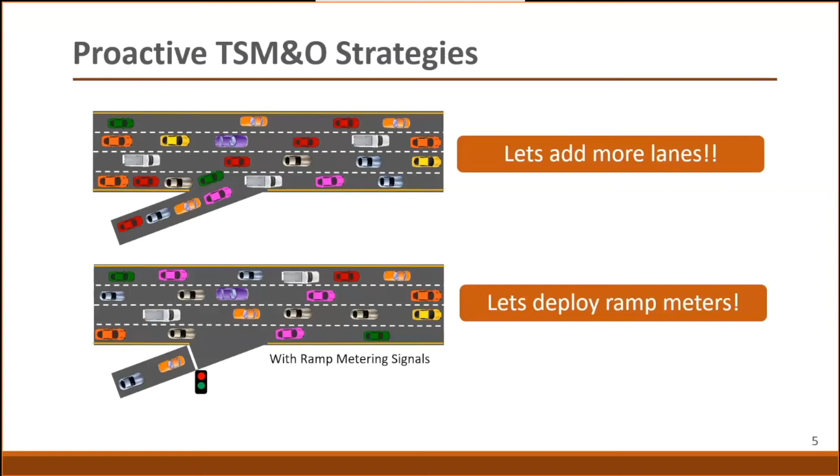I have one more example, though I don't have before-and-after or conventional-versus-TSM pictures here. What I want to show is how dynamic message signs, the signs we see on freeways quite a lot, provide travelers the information we need to make informed decisions. For example, if there's a crash downstream and the DMS says 'crash ahead, use caution' or 'crash ahead, detour,' drivers who pay attention to the signs may actually detour, reducing traffic upstream of that incident and reducing the probability of secondary crashes.

So what I've said so far are just 3 of the many examples of TSM strategies that could improve both safety and mobility of freeway operations.

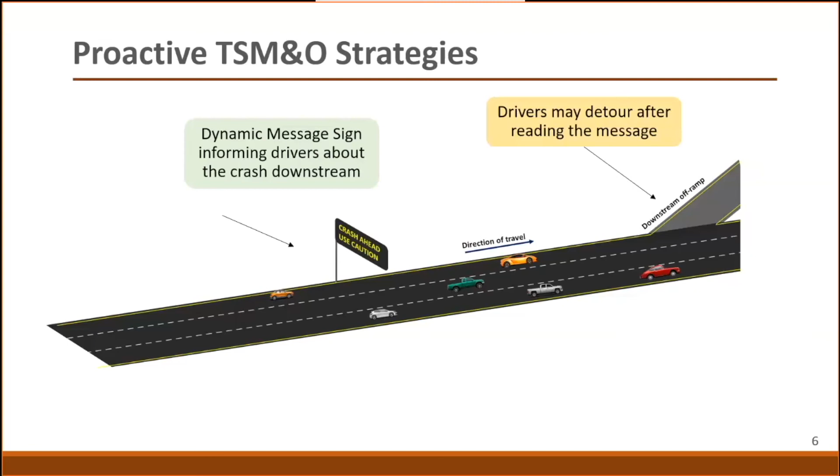Now that we have an idea about what potential TSM strategies are, let's go in depth about what these could do. First, these TSM strategies are integrated; they don't work in isolation, they work together. For example, in this figure you can see express lanes and dynamic message signs, and you also have CCTV cameras and ramp meters. All of these, arguably 4 TSM strategies, are working on the same corridor to improve the safety and operational performance of this freeway corridor.

With this slide, what I want to say is that TSM strategies are integrated, and it's not just one strategy that works. That could be the case, but in general we'd have multiple strategies to help alleviate congestion and improve safety on a facility.

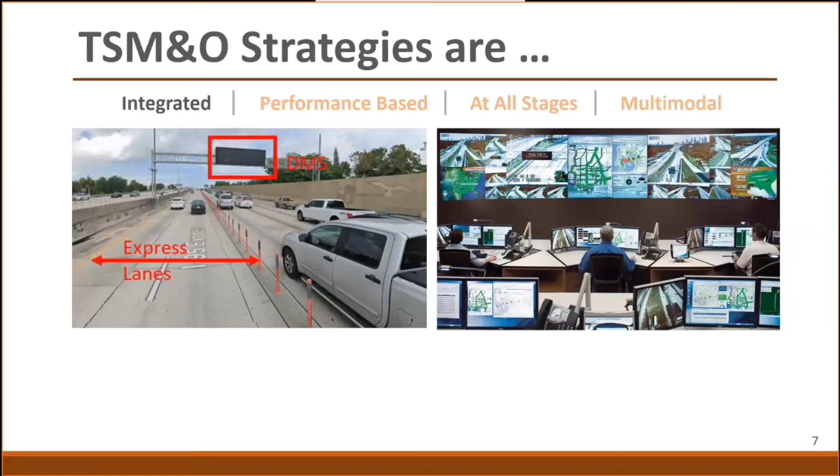Another important factor that separates TSM strategies from conventional strategies or countermeasures is that TSM strategies are performance-based; they're outcome-oriented. By that I mean all TSM strategies are geared towards improving safety and/or mobility. I don't want to say either safety or mobility, because the way I see it, safety and mobility are so intertwined and interlinked that you can't improve one without improving the other. In other words, if you improve mobility, safety will almost always necessarily be improved too, with a caveat in most cases.

And at the same time, if you improve safety, mobility also to an extent, in the majority of cases, will be improved. Some of the mobility performance measures are travel time reliability, which we'll talk about quite a bit in this presentation, as well as incident response time and incident clearance time, meaning how quickly an incident has been responded to and how quickly it is cleared, and also travel delays.

With respect to safety, we usually have two major performance measures: crashes, which is always the case since we want our vision zero, meaning zero fatalities and serious injuries, and also secondary crashes, which are crashes caused by the congestion resulting from a prior incident. I won't go into detail about what secondary crashes are, but those two are commonly used performance measures to evaluate the performance of TSM&O strategies.

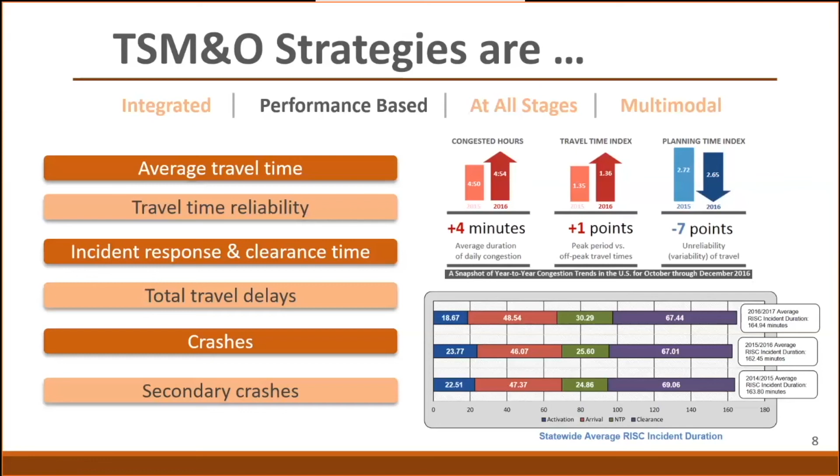TSM&O strategies are applied at all stages: planning, project development, and also operations and maintenance. The way I see it, recently TSM&O strategies are not an afterthought. They have become part of the planning phase, where potential strategies or alternatives to alleviate congestion or improve safety are considered. They are also part of the project development process and, obviously, operations and maintenance.

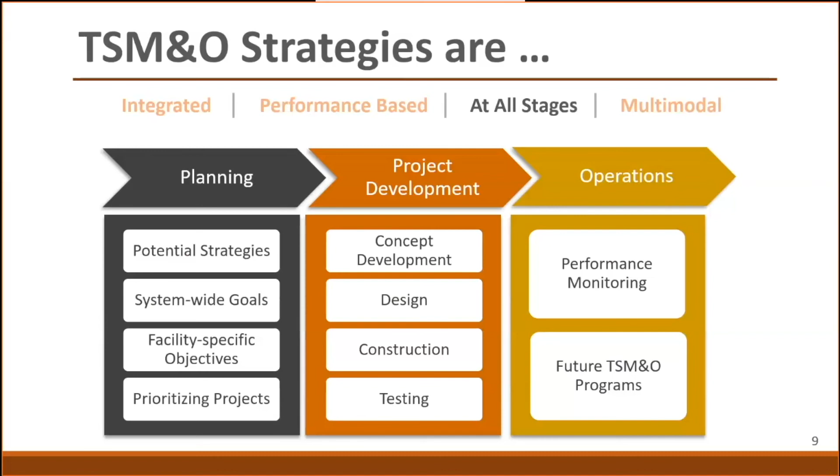I want to say that I am not biased towards freeways. It's just that a lot of my research projects have focused on freeways. TSM&O strategies are multimodal and not just dedicated to freeways, but it's easier to analyze TSM&O strategies on freeways.

We do have several TSM&O strategies focused on pedestrians, bicyclists, park and ride facilities, and transit facilities. For example, transit signal priority is a good example, or emergency vehicle preemption, or adaptive signal control technologies, and so on. So TSM&O strategies are multimodal, but in this presentation, since I don't want to keep you here for four hours today, I just wanted to focus on freeway operations.

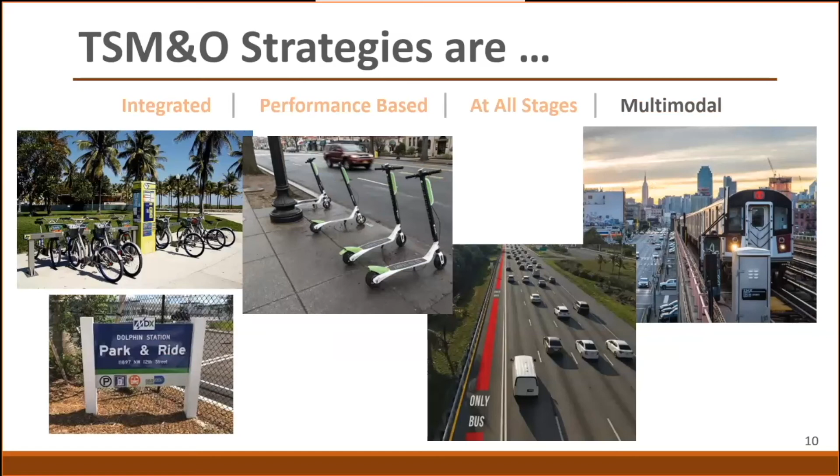In summary, these TSM&O strategies focus on three things: first, to preserve the capacity of the facility; second, to improve safety and security; and third, to improve the reliability of the transportation network—making sure it is more reliable, safer, and has less congestion.

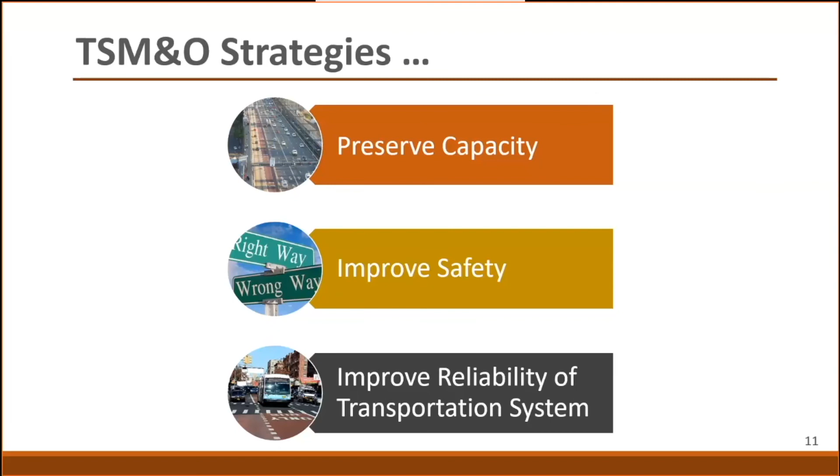Coming back to TSM&O in the context of Florida, in 2017—about 3-4 years ago—FDOT's TSM&O strategic plan was almost like an action plan for how TSM&O strategies could be deployed, implemented, and considered as part of the alternatives analysis. The vision of the plan and of the DOT is to have a fatality-free and congestion-free network, which itself tells you that safety and mobility are the most important factors that FDOT considers with respect to their transportation network.

The mission of this strategic plan is to identify, prioritize, develop, implement, operate, maintain, and update TSM&O strategies. I want you to pay much more attention to the next phrase, which is to measure their effectiveness for improved safety and mobility. One of the major takeaways for me from reading the strategic plan was that TSM&O strategies are there, but very rarely have they been quantified in terms of how effective they are.

Anecdotal evidence, yes—we know that express lanes improve safety anecdotally, and from talking to the general public or getting public opinion, we know that dynamic message signs provide valuable information. But up until this project we got a couple of years ago, we hadn't been able to quantify the effect of these TSM&O strategies—how effective are ramp meters in improving safety, reducing crashes, increasing travel time reliability, or reducing average travel time? Those are the questions we attempted to answer in the research project we recently completed, about a year ago, focused on the performance of TSM&O strategies.

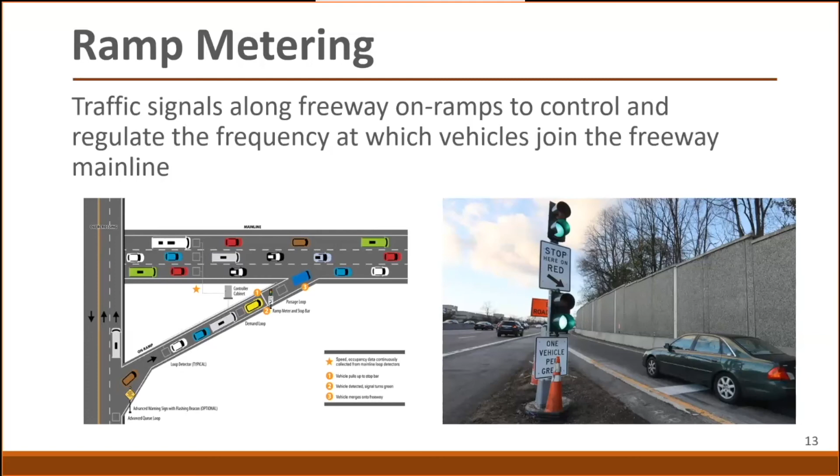Ramp meters are the traffic signals along the freeway on-ramps that control and regulate the frequency at which vehicles join the freeway mainline. The advantages are managing demand on the freeway mainline and helping break up platoons by controlling the rate at which vehicles enter.

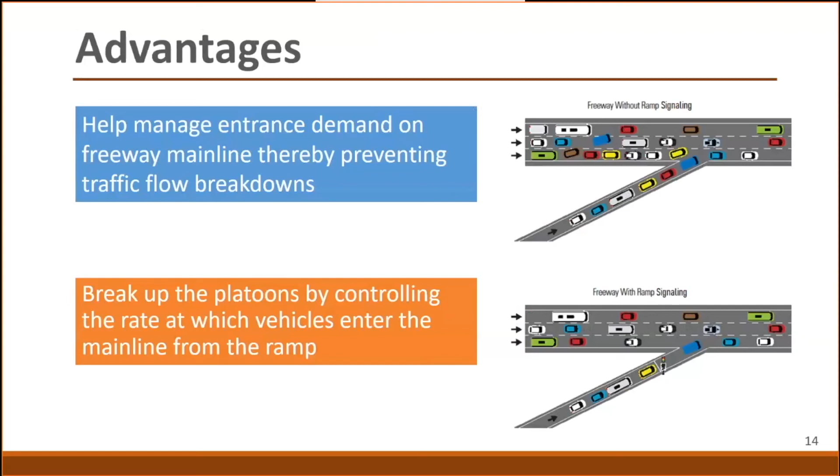For deployment, so far in Florida we have ramp meters operational on I-95 in Miami-Dade County. I think it's about 10 on one side, 12 on the other, so around 22 ramp meters on northbound and southbound combined.

Coming soon, hopefully this year or next year - the website said they're due to open in 2020, but COVID threw us a curveball, so I don't know - we do have another deployment of ramp meters on I-95 in Broward County.

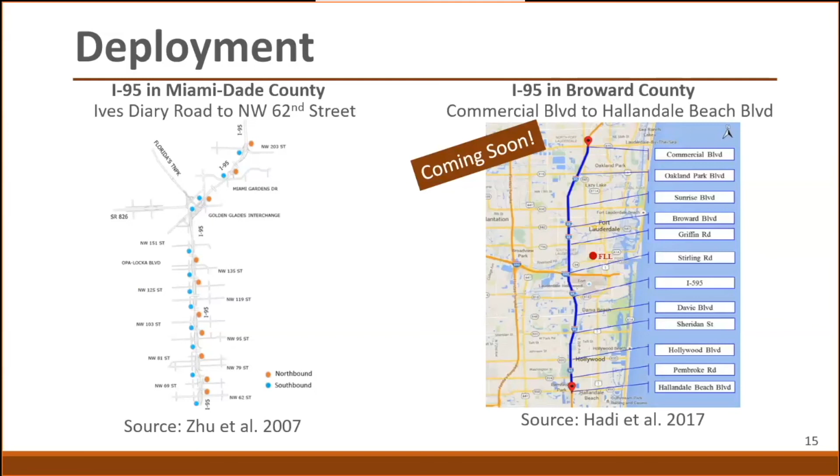In our analysis, which Hendrik did as his dissertation - so if you have any questions, knock on his door, I'm kidding, I can answer the questions, but it's his work - he focused on I-95 in Miami-Dade County.

The data we used is traffic data from RITIS, and we used 3 years of data, 2016 to 2018. We also received the ramp metering signals, RMS, operations data from District 6, RTMC.

By operations data, what we received was like when the ramp meters were turned on, when they were turned off, and the reason. We collected the roadway characteristics and contextual data, like where the on-ramps are, from Google Maps, and got the crash data from SunGuide.

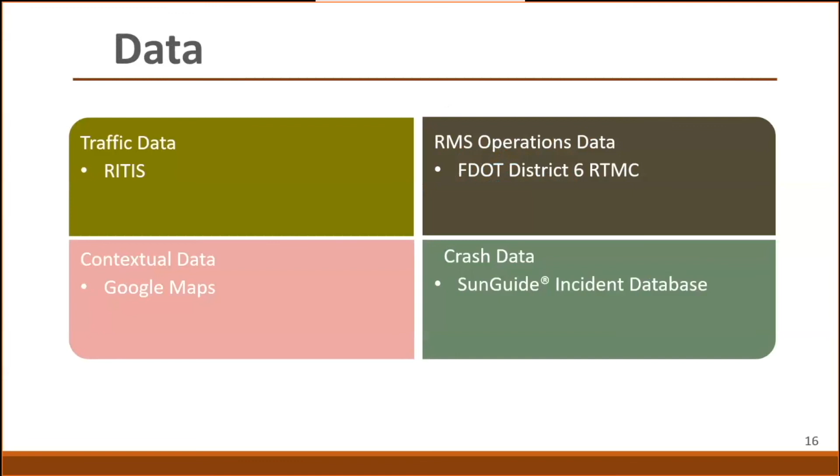For each of these strategies, we divided them into safety benefits and mobility benefits. For ramp meters, for the safety benefits, we identified the crashes that occurred when the ramp meters were turned on, and identified similar scenarios where there was no crash, and compared the performance of those two.

Since we have very few crashes and a lot of non-crashes, we had to do bootstrap resampling to increase the sample size. We analyzed based on crash precursors, which are the traffic flow characteristics prior to the crash, to see what factors contributed to or resulted in that crash.

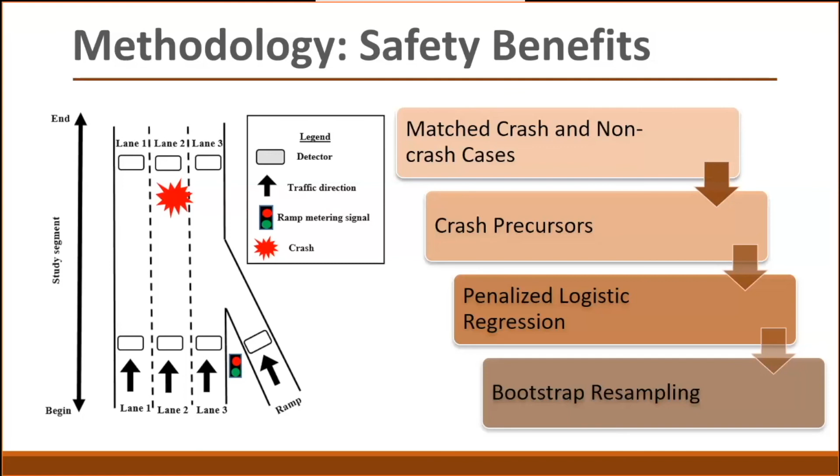So these are the results, on average, based on the FDOT report. I forgot the report number, but you can just Google ramp meters and FIU, and I'm sure you'll get this report.

What we found was, in terms of safety benefits, ramp metering decreased the crash risk by 41%. On the left you can see the crash precursors - when the precursor is the ramp meters being turned off, that means it's a congested time and the ramp meters are off because of a malfunction.

During that time, the average downstream volume - the traffic volume on the freeway mainline downstream of the ramp - was a good indicator of whether that segment would experience a crash or not.

When the ramp meters are turned on, it's usually speed, occupancy, and volume - the average of those, and also the coefficient of variation, which tells how the speed, occupancy, and volume are varying. These are some of the factors we identified as contributing to the occurrence of a crash.

Agencies could use this information to effectively and efficiently deploy responding agencies, and also to turn on or activate ramp meters.

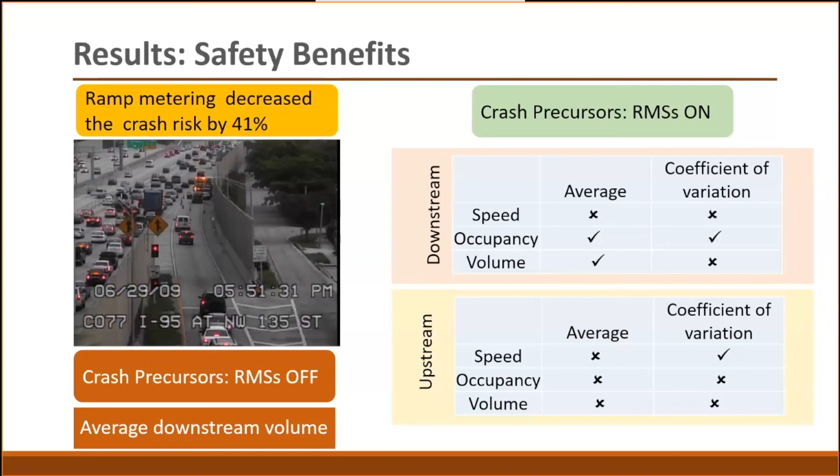Based on the mobility benefits, we compared the ramp meters when they're turned on versus when they're turned off. This entire analysis is focused on recurring congestion, not non-recurring congestion - in fact, Henrik is doing that right now as part of his dissertation, as an extension. But this research is just focusing on recurring congestion.

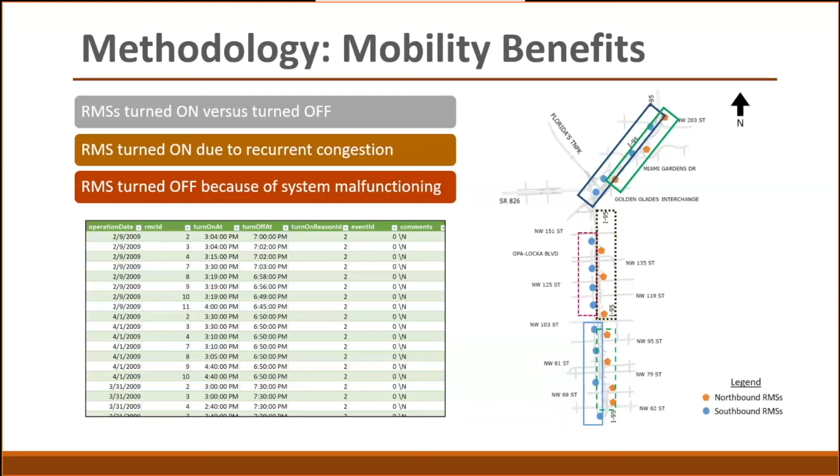For mobility benefits, what we used was the buffer index, which is a travel time reliability measure. The buffer index is a time cushion - the amount of additional time that most travelers would add to their average trip to make sure they arrive on time.

What we found was that when the ramp meters are turned on, and a driver uses the facility during moderate congestion, the buffer index is reduced by 22%.

During severe congestion, say morning peak hour or evening peak hour, the ramp meters would reduce the buffer index by 30%. Let me put that in perspective.

Say, for example, I'm at FIU, and if I'm planning to give this presentation in person at FAU, the travel time is about 60 minutes. So if I have to be there on time, at 1 o'clock, I would put a buffer of say 15 or 20 minutes, so I would start here at 11:40 to make sure I am there at 1 o'clock.

But if you have ramp meters turned on, assuming that during afternoon time is moderate congestion, I don't need to put a 20-minute buffer. I could go with a 15-minute buffer. So instead of starting at 11:40, I could start at 11:45. That is how much ramp meters could affect, and that is how we quantify the mobility benefit of activating ramp meters along the corridor.

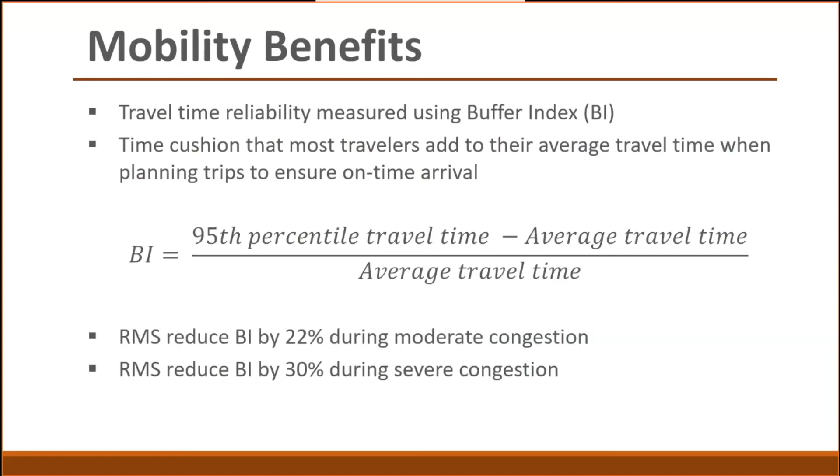Of course, that example may not make complete sense because I don't think I would be taking I-95 to go to FAU, or maybe I do, I don't know, I follow Google Maps. But you get the point. So that is how the mobility benefits of ramp meters were quantified.

Now, switching gears a little bit and moving to dynamic message signs. What are these? These are signs we see everywhere, especially on freeways, used to disseminate real-time information—sometimes travel time, or a crash ahead, or any incident downstream, or adverse weather, or sometimes alerts like click it or ticket, don't drink and drive, put your cell phone down.

This was actually one of the more difficult strategies to evaluate, because it's quite interesting to see how you can quantify, with data, how effective displaying a message on a dynamic message sign is. That is what we were trying to tackle with this strategy, and Cecilia was the one working on it. If you have any questions, ask her—I think I can answer, but she's the person to go to.

Overall in Florida, we have about 900, or 869, DMS signs, and they're operational 24/7, conveying time-sensitive information. Mostly it's travel time or incident information, or advisory information such as click it or ticket, don't drink and drive, don't text and drive, etc.

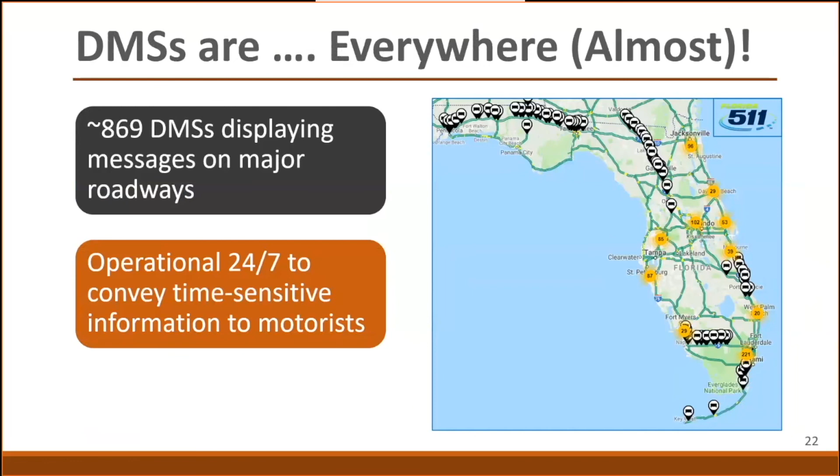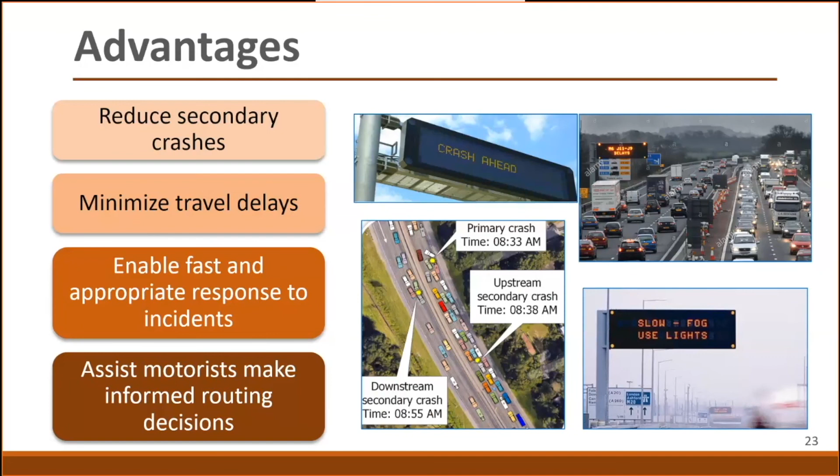Some of the advantages of dynamic message signs are that they reduce secondary crashes, minimize travel delay, and provide motorists with the information they need to detour, reroute, or plan accordingly, or to change their travel behavior accordingly. With the next slides, I think you'll have a better idea of what we're trying to say.

Again, we wanted to evaluate the safety and mobility benefits of displaying a certain type of message. In this case, we focused on crash-related messages on a DMS sign. Our study corridor was I-75, and we used 3 years of data, '16 through '18, focusing on locations with 23 dynamic message signs.

So we needed 3 types of data, just as with ramp meters. From the district TMCs, we needed the dynamic message sign locations and logs—what information was displayed at these signs and for how long. Say from 12:55 to 1:07, the information displayed was 'crash ahead, use caution.'

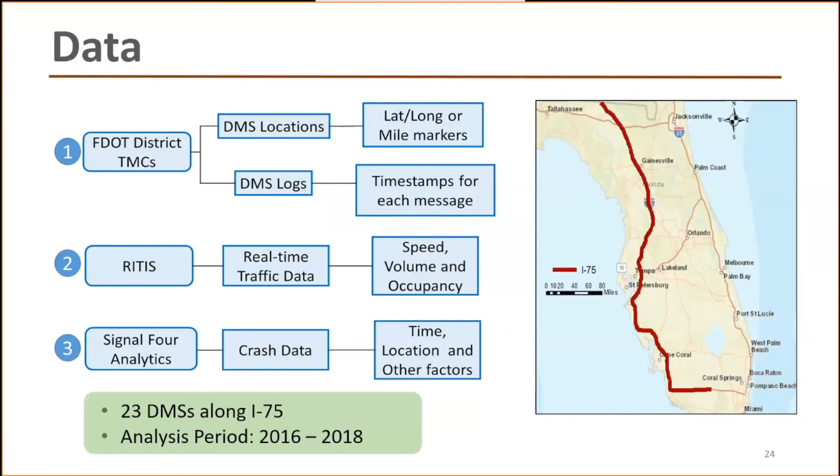We also needed data from RITIS, which provides real-time traffic data—speed, volume, and occupancy. That's almost the same; we've used that for all of our strategies. And we obtained crash data from Signal 4, which includes time, location, and other factors such as crash severity.

So how did we quantify the benefits? This is a schematic of where the dynamic message signs are, for example, and what we called an upstream detector, which would be up to 1,000 feet upstream of the crash or the DMS. Why did we choose 1,000 feet? Because we found that is the distance from which a driver could see the DMS sign.

I don't think I asked Cecilia to drive through all 23 locations to see when she could see the signs, but from research we found that 1,000 feet is an acceptable distance to consider. So the upstream detector, and the detector downstream of the DMS, is what we consider the downstream detector, from which we collected the data.

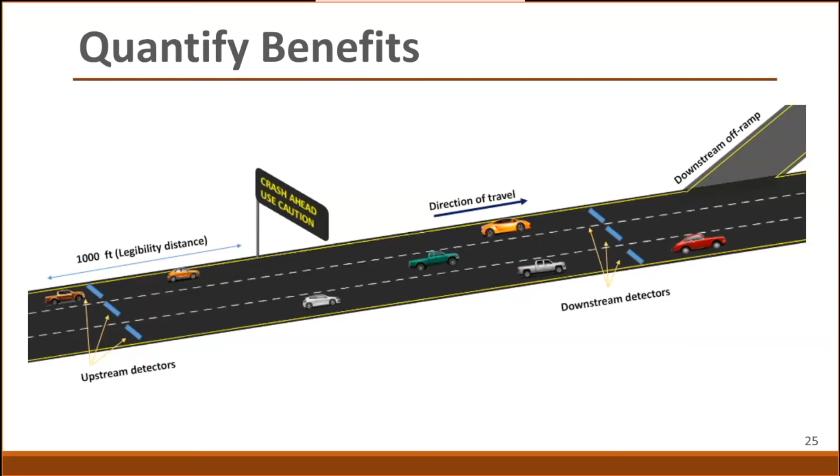I made this slide busy so that you pay more attention. In general, what I'm trying to say is that for dynamic message signs, we identified the times when the DMS displays a crash-related message, like 'crash 3 miles ahead, use caution.' We compared the performance of drivers in terms of average speed and coefficient of variation of speed with clear messages.

A clear message is one that is not related to a crash and does not require drivers to react, such as 'buckle up,' 'click it or ticket,' or 'no reported delays.' So we compared the travel speeds when drivers saw a crash-related message, and whether they were changing lanes, with their speed and lane changes when the DMS displayed a clear message unrelated to a crash.

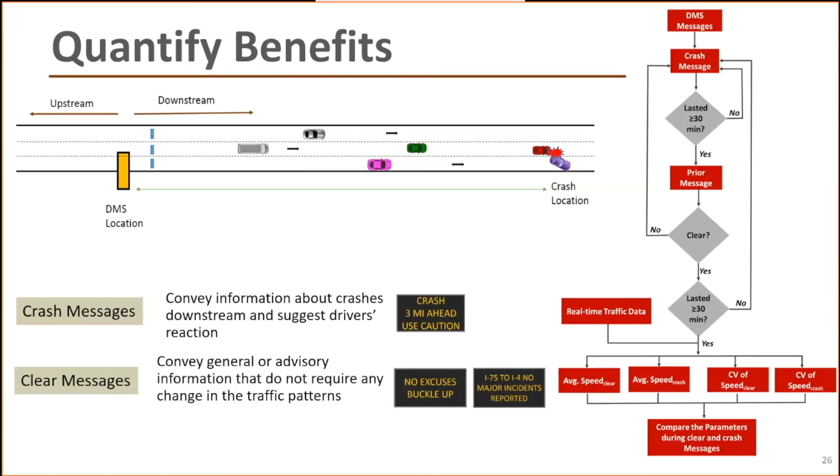We found, interestingly, that the speed variance increased. That means drivers were reacting to the sign, whether by changing lanes, or maybe aggressive drivers sped up because they knew there was a crash downstream and wanted to get past quickly, while conservative drivers slowed down. That may be why we saw speed variance shoot up.

We did not find any significant increase in crashes downstream of the DMS. This is somewhat contradictory, because we usually say that high speed variance is a surrogate measure for crashes—higher speed variance usually means you'll most likely have crashes. But that was not the case here.

The way I see it is that people are cautious. They know there is a crash ahead, so there is a lot of speed variance, but people are not distracted—they're cautious. That's why, even though we observed an increase in speed variance, there were no adverse safety impacts.

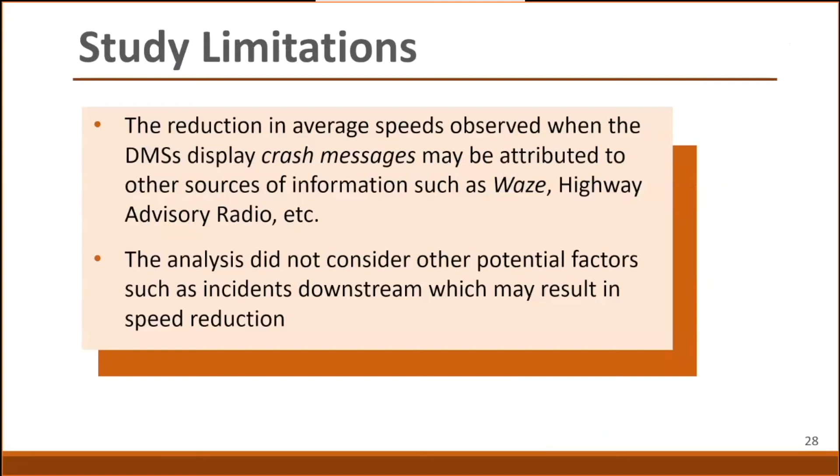Okay, so I have about 7 minutes or so, I think—we will see.

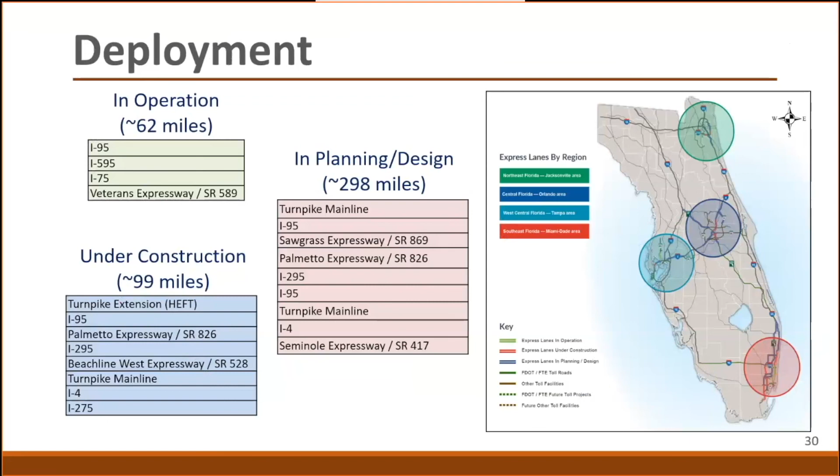Now coming to the last strategy, which is express lanes. As we all know, express lanes are managed toll lanes—I call them a freeway within a freeway, separated from the general purpose lanes, with a higher or better level of service. They are deployed in many places; we have about 62 miles in operation, about 100 miles under construction, and about 300 miles in either planning or design phase.

The advantages are that they reduce overall traffic congestion, improve safety, and increase the overall capacity of the highway.

So when we were tasked with quantifying the mobility benefits, we did two things. We compared the performance of express lanes with that of general purpose lanes—express lanes are the ones where we pay a toll, while general purpose lanes are free. We also compared the performance of general purpose lanes when the express lanes are open versus when they're closed. These are the two types of comparisons we did, and I believe we published this paper in TRR.

This is Cecilia's work. The data includes RITIS data, express lanes operations data, and contextual data from Google Maps.

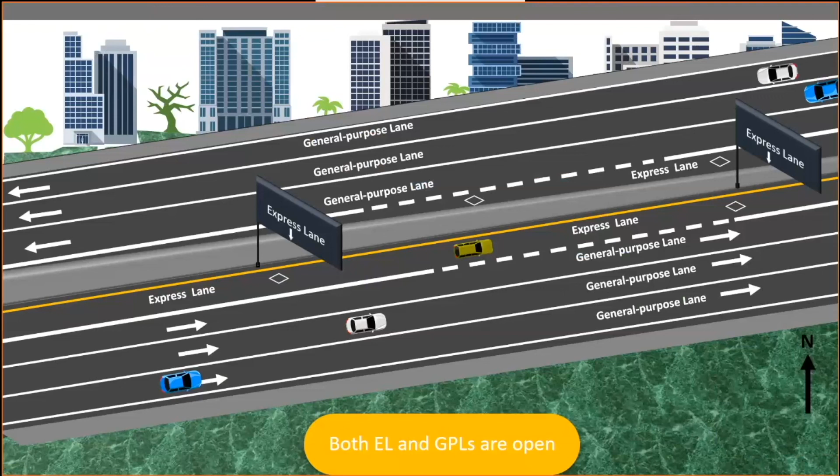I'm going to skip this because we don't have time, since it's very difficult for us to visualize what we're trying to do. So this is what we're trying to do.

First, we're comparing the performance of the general purpose lanes when both are open, meaning people can move from general purpose lanes to express lanes, with the performance when the express lanes are closed, so drivers have no choice but to continue on the general purpose lane.

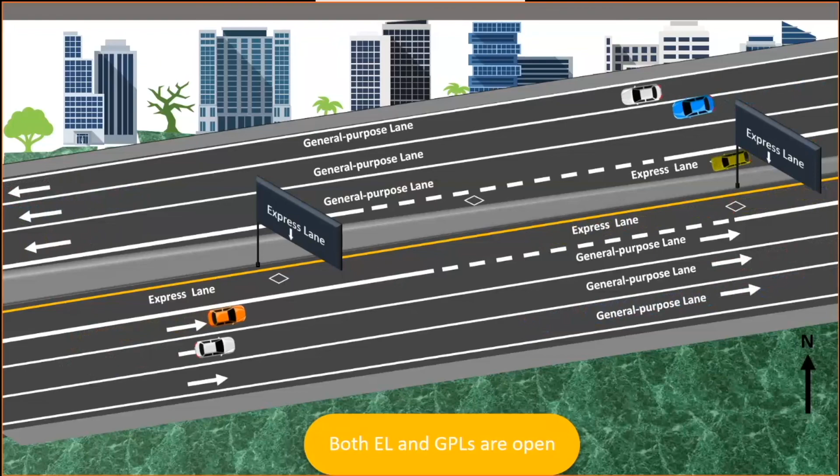This is another scenario, when both express lanes and general purpose lanes are open. Here, what we're trying to see on this facility is how the express lanes and general purpose lanes are performing when both are open. This is what we found.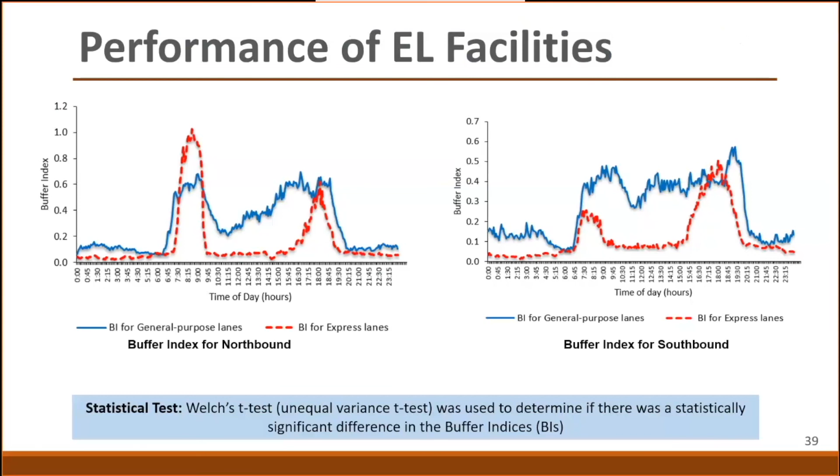But overall, in general, the buffer index for express lanes is much lower than the buffer index of the general purpose lanes, and all of these results are statistically significant. We did the test, and all of these differences are significant.

So in short, when express lanes were operational, the performance of the general purpose lanes improved. In general, both the express lanes and general purpose lanes perform better when the express lanes are operational. Tying this back to the first example comparing conventional improvement versus TSM&O strategy, if we have the same roadway footprint, our mobility analysis found that adding express lanes and reducing the number of general purpose lanes improves the performance of both the general purpose lanes and the express lanes.

So that is the mobility component, and this is the safety analysis. We recently got this project - it feels like just a few months ago - and we're in the process of completing this research project, which focuses primarily on the safety analysis of express lanes.

The goal is to quantify the effects of separation types, the managed lane or express lane separation types, on the safety performance of these express lane facilities.

For this ongoing research project, we have three objectives. The first is to develop safety performance functions under specified base conditions. The second is to develop crash modification factors, focusing on different separation types and other geometric attributes. The third is to develop severity distribution functions to estimate the expected frequency for different severity levels.

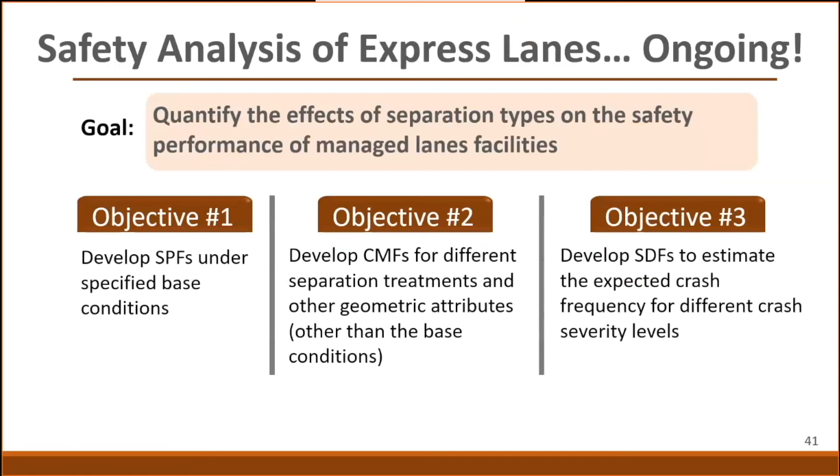Since this project is ongoing, I don't have any results as of today, but once this is complete, this is what we will produce. The project requirements are the SPFs, CMFs, and SDFs. This is a typical safety research project, I would say.

In addition to the project requirements, we are also producing other byproducts, which would be a spreadsheet application, so that it's easier for practitioners to implement and do the analysis, a GIS inventory of managed lanes, 1-page summaries of the results, a 1-hour recorded webinar, and a set of sample problems for professionals and practitioners to use.

In this project, what we are focusing primarily on is the separation type, and we have 3 separation types. We have the pavement marking buffer separation, where the separation between the express lanes and the general purpose lanes is just a buffer with dotted lines or pavement markings. We have the concrete barrier that separates the express lanes from the general purpose lanes. And we also have the pylons, which are on I-95, that separate the express lanes from the general purpose lanes.

We also have the wide median buffer separation. However, we are not focusing on analyzing that, so we'll be analyzing everything else except the wide median buffer separation.

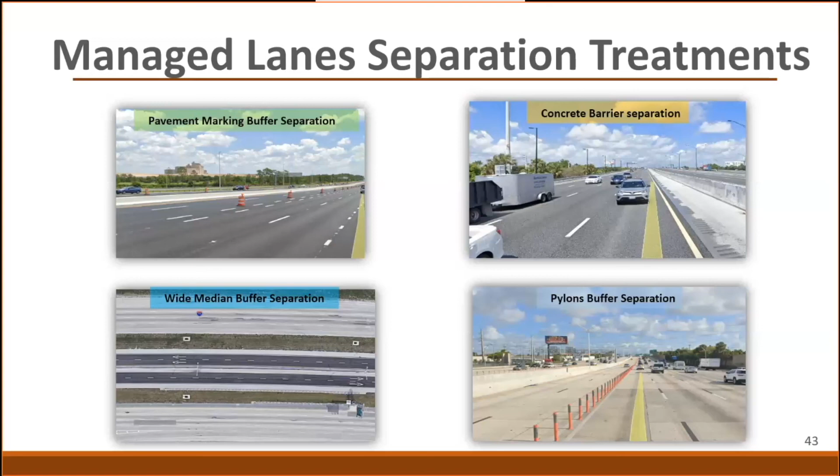As I said, I don't want to use the word 'just started' because the kickoff meeting was in June, and we are halfway through it, in the process of data collection, analysis, and development. We will have the results and everything ready by the end of this year, November. So that is the project that's going on.

So this is my last slide. In summary, bringing it all together, what we found is that, having worked on TSM&O strategies quite a bit, TSM&O strategies are proven to improve the safety and mobility, overall the operational performance of the transportation network, not only for freeways, but also for arterials. But what we found is that the safety and operational benefits are unique to the strategy.

The benefits for deploying ramp meters, even the performance measures, are different from the performance measures we could use to evaluate managed lanes, which would be different from the performance measures we use to evaluate dynamic message signs. It should not be surprising, but while some strategies provide direct quantifiable benefits like ramp meters and managed lanes, or on arterials, transit signal priority and adaptive signal control technology, it is difficult to measure the impacts of some strategies.

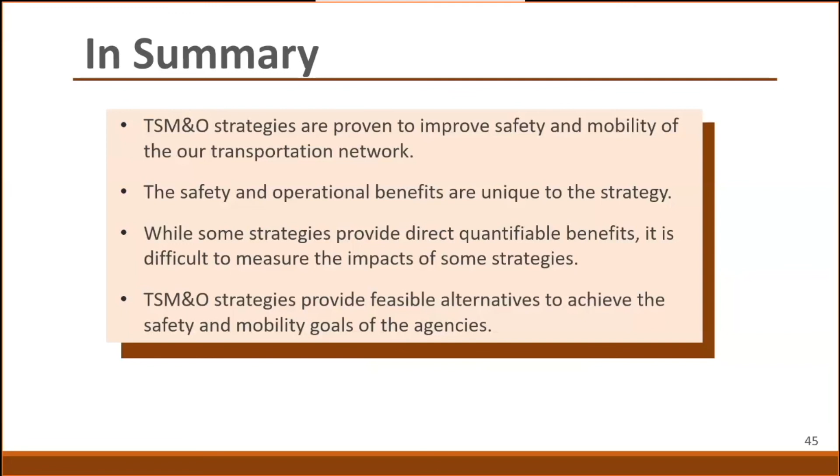So that is, I think, one of the takeaways from this presentation. But I think that is all I have. Oh yeah, so again, I just talk, I don't do any work. Actually, I do work, but this is my research team, and I would like to thank each and every one of them for helping me put this presentation together and helping me with the research projects.

And if you have any questions, comments, I hope I did not go over time.